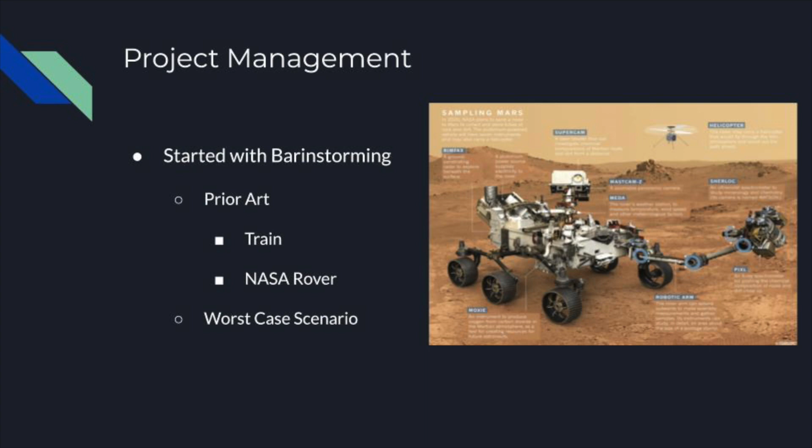We made a functional block diagram with the main components such as cargo, drivetrain, and power and showed how they interact. We made a work breakdown structure identifying the main components of the macro, with those being drivetrain, cargo bay, cargo offloader, and control system, and gave a brief timeline of the process to design and optimize them, finishing with the final product. We also used need-finding charts for each subcomponent so that we could maximize our success.

For the customer needs for the drivetrain, we talked about how we needed it to move forward and backward at a desired speed, to rotate the robot counterclockwise and clockwise at the desired angular speed, to accelerate and brake when needed, and to overcome uneven terrain.

Our target values were to go about 20 centimeters per second forward and backwards, to be able to rotate at about 6 degrees a second, to have an acceleration and deceleration speed of about 5 centimeters, and to overcome about

a 20-degree incline. For the cargo bay, we decided we needed a large cargo bed to carry up to 3 items, and we needed to hold it in a stable position so it would not fall on the track.

For the cargo offloader, we desired a 100% success rate on releasing our cargo top side up, and we needed to quickly drop off the cargo to maximize the time that we could run around the track, and that time was about 3 seconds to complete the process.

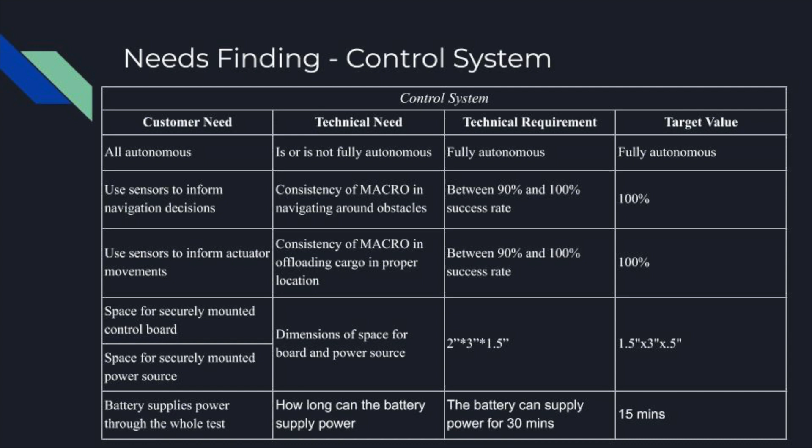For the control system, we needed it to be all autonomous. We needed to use sensors to inform navigation decisions as opposed to user-defined inputs, and to inform actuator movements in the motors. We needed space to mount the control board onto the body of our macro design, and to mount the power source around the same area, with the battery supplying power throughout the whole test.

We created a Gantt chart to help stay on schedule throughout the entire process. We wanted to start the code very early to make sure we could build the robot around it. We wanted to design the drivetrain, test it, design the cargo bay on top, test it, and make sure it works. We wanted to design the cargo offloader, and by that point we would have everything working.

The two biggest factors while considering the design of the macro were the driving and unloading mechanisms. For the driving mechanism, we considered four-wheel drive, two-wheel drive, and tank drive. Four-wheel drive would provide greater traction and control, however it seemed too complicated for its benefits to outweigh its difficulty to design and code.

With two-wheel drive, we would have the same amount of stability as four wheels, but possible unwanted friction. With three wheels, we would have less friction, but possible instability in the macro. Tank drive would provide the most stability and still have control. At first we thought six wheels was best, but after seeing unwanted friction happening, we eventually went to four wheels and then two-wheel tank drive.

For our offloading mechanism, we considered a motorized wheel to push off the cargo, a wide ramp either behind or above the drivetrain, or a long ramp above the drivetrain. The motorized wheel idea seemed too likely to be inconsistent, and the wide ramp ideas seemed too cumbersome, so we worked with the long ramp idea.

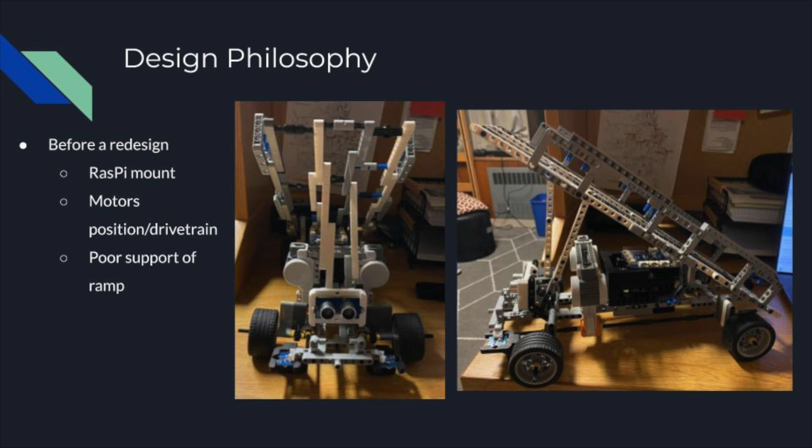Before the redesign, the Raspberry Pi mount and the poorly made support of the ramp caused an uneven distribution of weight and problems with the drivetrain. Because we still had four-wheeled tank drive, the motor spun an axle which spun 2 wheels. In our redesign, we removed the back wheels to decrease friction and attached the motor directly to the wheel to eliminate possible error in the gears and axles.

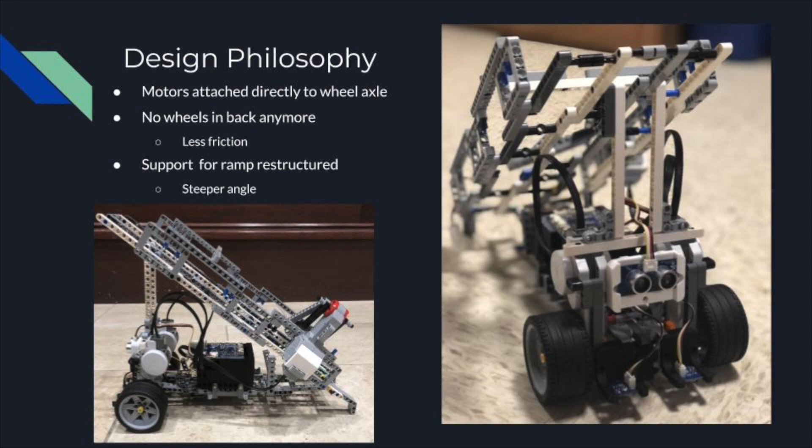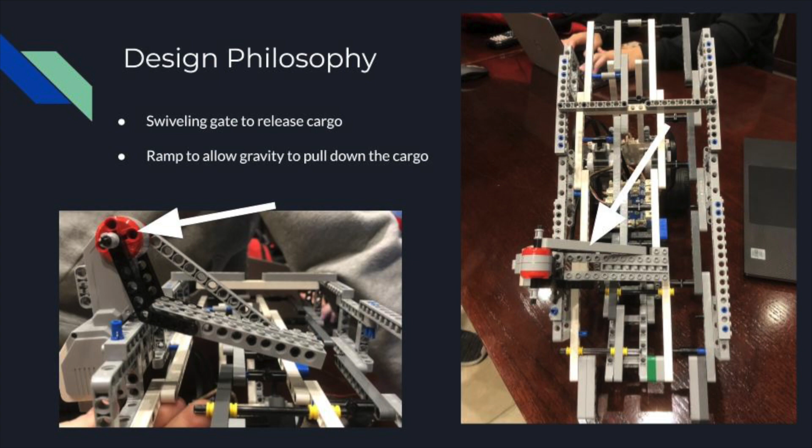Additionally, we reconstructed the ramp for stability and proper support. The final ramp was set at a steeper angle than before, as cargo fell more consistently upright with this design. The cargo will be set in place on the ramp and held by walls and a swiveling gate, as seen in the pictures. When ready for drop-off, the gate would swivel open, causing gravity to pull down the cargo and land upright. The gate would then swivel upwards, wait until the cargo is dropped, and return to its initial position.

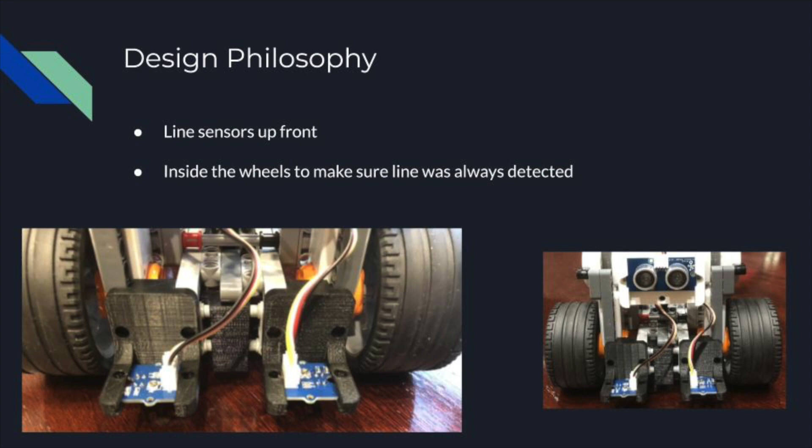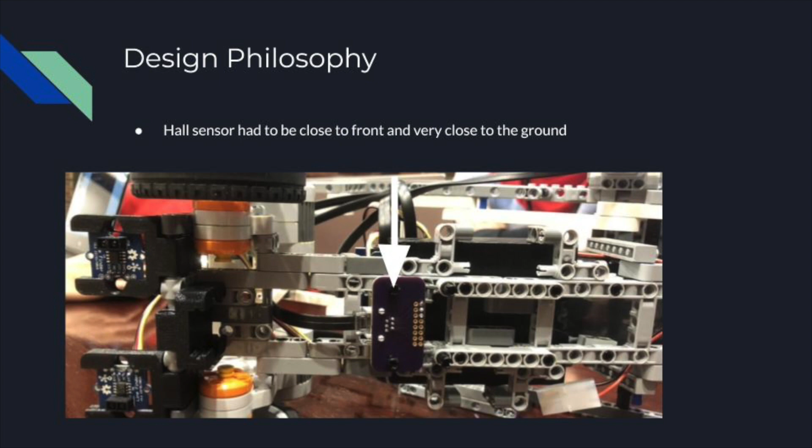We attached 2 line sensors on the front of the macro so a line was always detected and decisions to turn were made consistently. Line sensors were slightly in front of the wheels, so decisions could be made on time. The hall sensor was placed at the bottom of the macro, extremely close to the ground, to detect the magnetic beacons. The hall sensor was in the middle of the macro because decisions to turn and drop off were not pressured by time and didn't need to happen immediately.

For the software logic, starting with line following, the code works independently for each motor. If the line sensor is over the white, it'll tell the motor to go forward, and if it's over the black line, it'll tell the motor to go backwards. We had to adjust the power values to tune the turning radius. If it was too low, the macro wasn't able to turn at all, and if it was too high, the macro was too finicky and wasn't really able to move forward.

The older version of this code used a while loop that told a wheel to go backwards if it was over the black line, and this worked well. It allowed it to go a little bit more straight along the line. However, the alternating motion that this new code has allows it to follow a dotted line, which was essential to us.

For the cargo drop-off, the code first resets the encoder position so that wherever the motor is currently at is now encoder position 0. Then it tells the motor to go to a certain degree position. We chose 180 degrees because this ensures the arm is fully out of the way of the cargo and lets it slide out without hitting the arm.

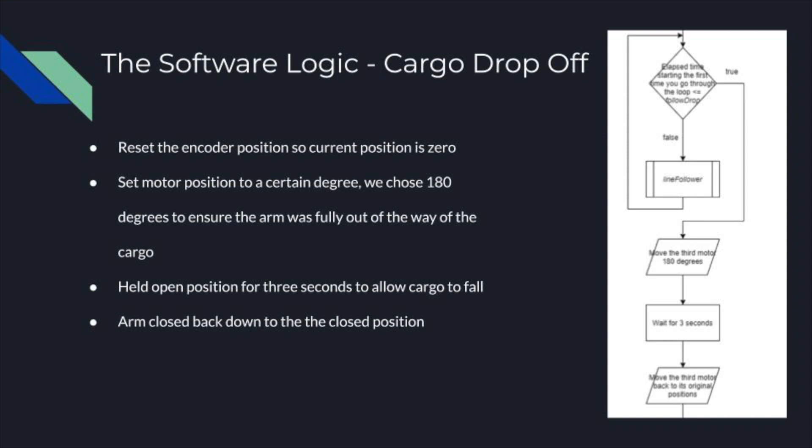It's then held in the open position for 3 seconds. This gives plenty of time for the cargo to fall off and fully deploy, making sure the arm doesn't hit the cargo on the way down. Once those 3 seconds are up, the arm resets to the 0 position and is in the closed position.

For beacon detection, we use an analog hall sensor. We chose the analog over the digital sensor because the analog allowed us to tune in the precision a little better, since it gave us a larger range of values to work with.

What it first does is read the hall sensor value. I subtracted 1900 just so the numbers would be smaller and it would be easier for me to see if there was a difference in readings.

If the value is less than a preset threshold, which we determined by testing, then it says the beacon is detected. If we want to count the beacons, we tell the robot to sleep for 2 seconds after the first detection to avoid detecting the same beacon multiple times.

First, it line follows until the beacons are counted to the indicated drop site. This is a variable that you input — say you want to go to drop site 2, you'd input the value of 2 for that variable, and then it would count the number of beacons.

Once it navigates to the drop site by line following and counting the beacons, you have to deploy the cargo. That's its own section of code, and then it has to line follow back to the landing zone.

Although this was only 4 steps, there were a lot of minor issues along the way, especially turning on to the drop site, because our typical line following code was not super reliable for choosing the right path, so we had to write specialized code for that.

Before even integrating everything, we had the individual segments of code, for example the independent line following, cargo drop-off, and beacon detection. So all we really had to do was stitch it together using logic and control structures.

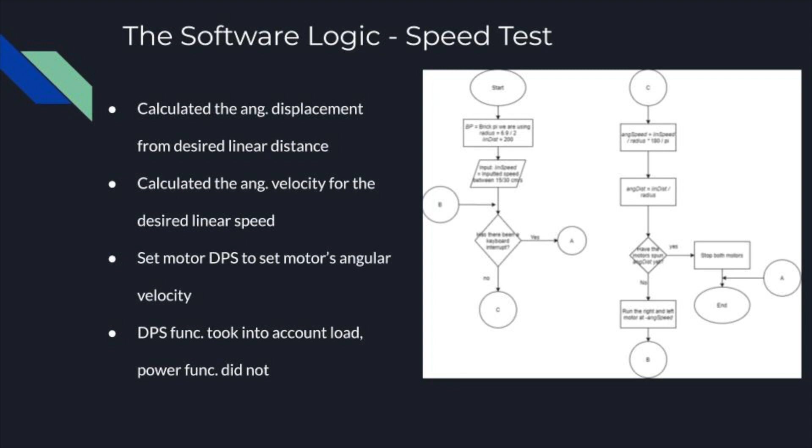Next, we need to consider the pros and cons of our prototype. The first pro being our ramp, as our design was large enough to hold all the different types of cargo and could deliver them without tipping each time they were offloaded.

For instance, in a trial of dropping off cargo 20 times, the cylinder was offloaded straight 20 out of 20, the cone 16 out of 20, and the rectangular prism 19 out of 20 times. Therefore, very precise.

Along with the cargo offloading time being pretty low at 4.69 seconds.

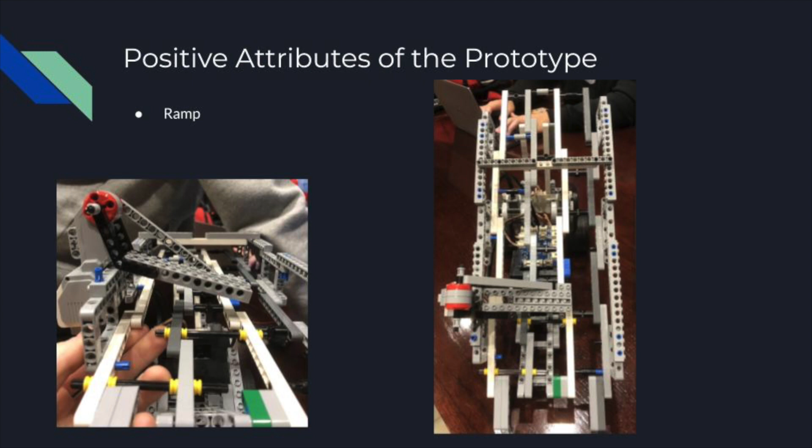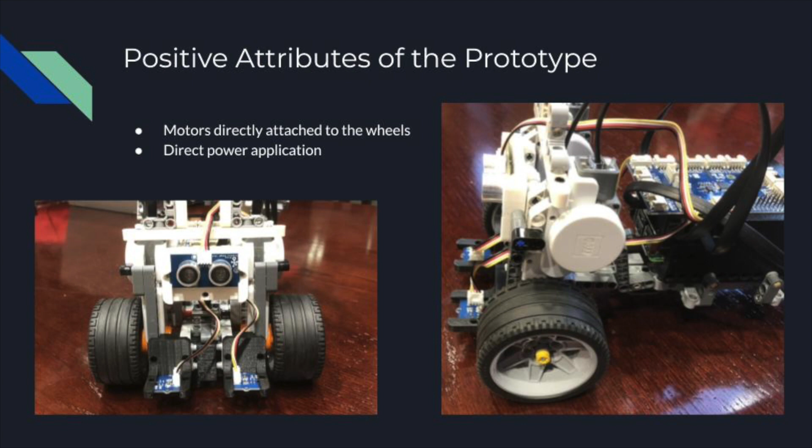The next positive design feature of the robot was attaching the motors directly to the wheels. Compared to our previous design, this delivered more power and was also 100% better in the line following tests, both for the dotted line and the dashed line.

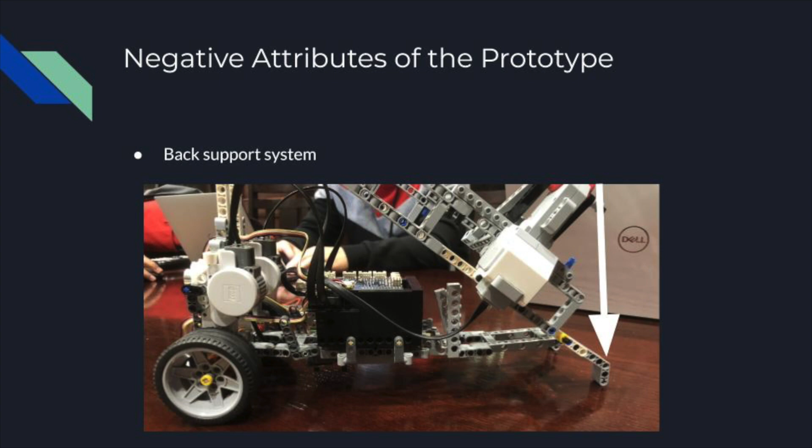Next, we need to consider the cons. Our first con being that our back wheels, which were bent Lego pieces, were not successful in getting over the first obstacle and had a significant amount of friction on the gym floor compared to the practice area, which inhibited our ability to turn. When tested on the practice terrain, out of 20 trials, on the most aggressive turn, we had a minimum turning radius of 3 plus or minus 0.2 inches. However, this was not the case during the actual test.

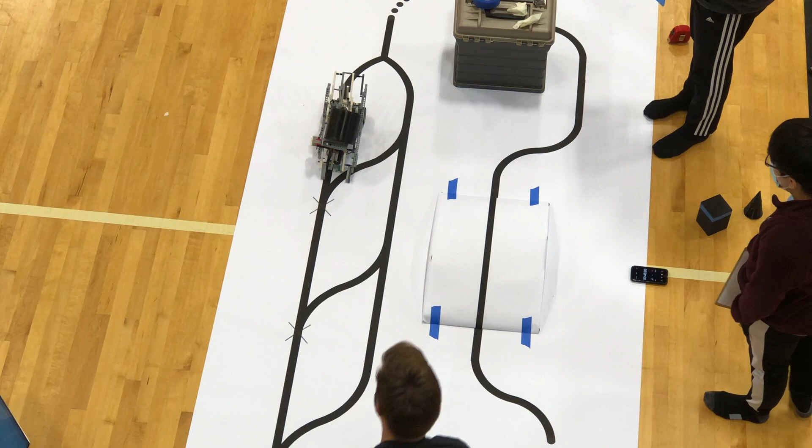Next, we ran into a problem with our line finding code, because it did not consistently have the ability to turn at the magnetic beacons to then drop off the cargo. Out of 20 trials, it only went down the right path 5 times, deciding rather to go straight, which was something we should have improved on.

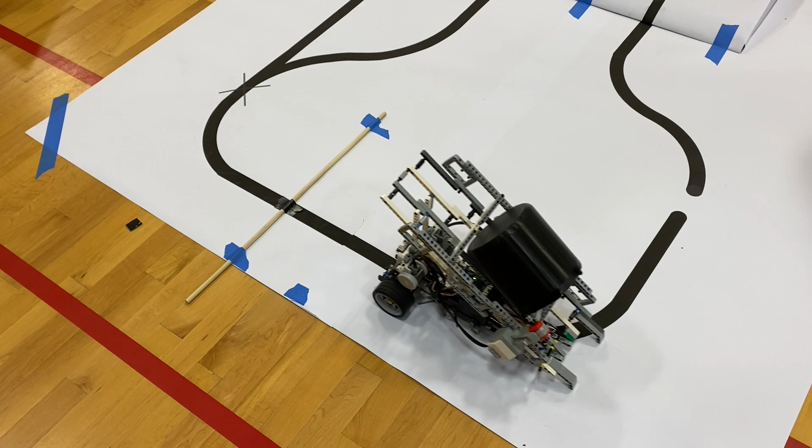Finally, our drive deck could have used some improvement, since it was too close to the ground and at one point had our Hall sensor get caught. Additionally, it only had a 60% success rate of identifying both beacons and offloading the cargo.

In conclusion, our physical and software was flawed, as the Hall sensor and backside support systems could not get over the obstacle and made it hard to turn, and in our software, we were not able to accurately identify both beacons and offload the cargo consistently.

Therefore, in order to improve our macro's performance, a couple of things needed to happen. The first being the back wheels needed to be replaced by actual wheels instead of curved Lego pieces, which not only would remedy our problem of not being able to get over the obstacle, but also would help with making it around the tight turns in the track.

The specific way to change this would be to attach wheels that could swivel in the back, which would lift the macro further off the ground and allow for tighter turning. We also need to make the drive deck higher off the ground, which starts with making actual back wheels, but aside from that, we would then attach more supports between the ramp and the deck, and also horizontally between the components making up the drive deck, improving its stability.

Another thing we needed to improve is the code for the Hall sensor. This is because one of the worst parts of our robot was its inability to successfully identify the beacons and then trigger the offloading of the cargo. A change that would make this better would be to find an increased range of values using the analog Hall sensor, and we should have tested more to figure out a wider range of those values that would then signal the Pi that the macro was over the magnetic beacon.

Finally, one of the most important improvements we should have made was in the line finding code. Once the first magnetic beacon was identified, the macro needed to be able to turn to the right consistently, rather than our pitiful 5 out of 20 success rate.